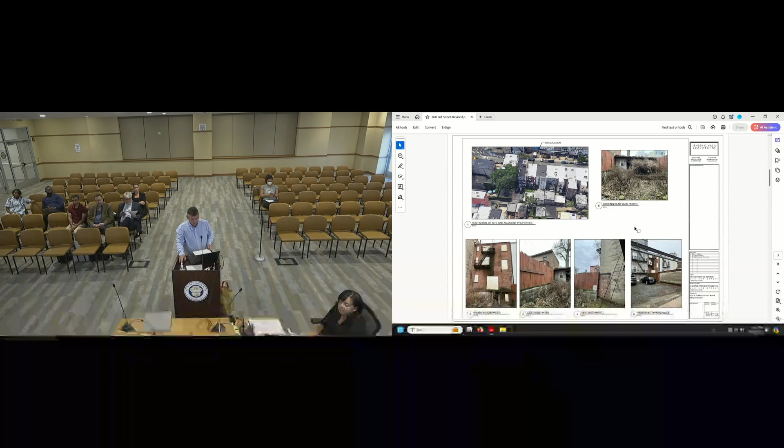Moving on to HPC 3, you can see the aerial view from the north in detail 1, showing the mixture of rear additions and garages, and then through that alleyway, which bisects the block.

Number 2 is the existing rear of the building. The building had been gutted, the interior is completely gone, all finishes have been removed, wiring and everything, so they've boarded it up.

Obviously we would keep the existing structure. We wouldn't be moving floors around, and we'd keep the openings in the front, as I mentioned, so there's no substantial change to that. When we do the addition, we'll be keeping the returns of the brick wall of the original principal building up to the jamb line of the windows on either side.

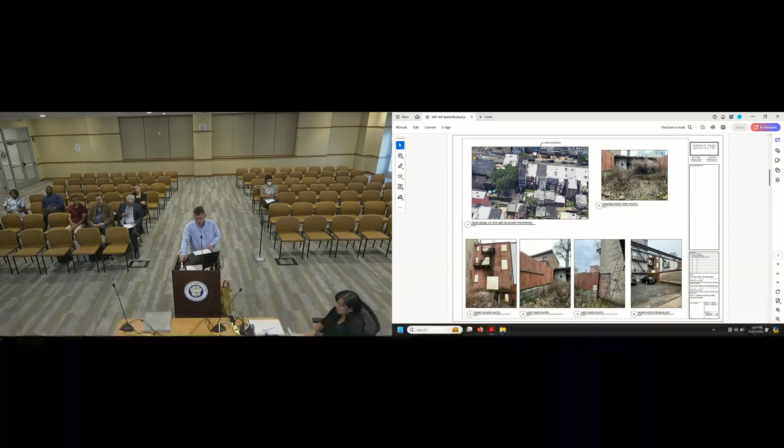Detail 3 shows the side yard, where you can see the building to the west is already a 2-story garage, and we'd be going right up against that. That's where the wood fence on top of the retaining wall would be. To the right is a sizable 4-story brick apartment building that would obviously remain. Number 6, the final picture on that page, is viewed obliquely from the alleyway, so you can see a little bit of the back through the neighbor's parking area.

HPC 4 is demolition of the existing building, showing what is there now. The stair is all the way in the rear, but there are no interior partitions. We'd be removing the fireplaces all the way up.

In the garage, we would be keeping the facade, the brick, the cornice, and the door fronting the alleyway, and then the back facade facing the court would be redone.

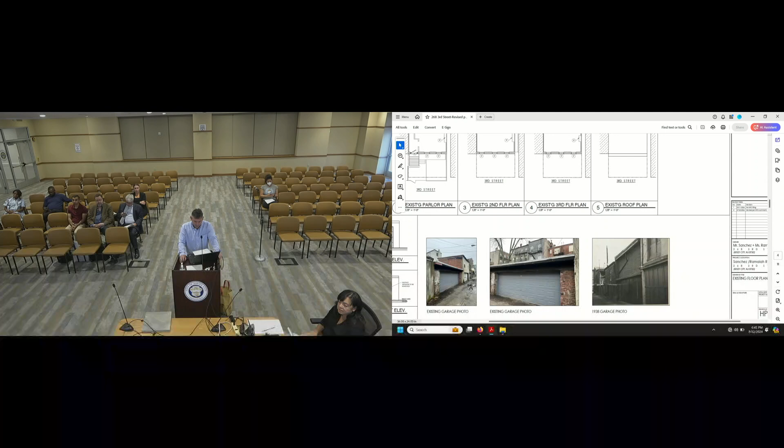I'm going to zoom in really quickly on the 1938 photo. It's actually a pretty decent photo of what was there from that time period, showing the 2 stories.

On HPC 5, the proposed condition has the bottom floor garden level as informal living space, with a family room, bathroom, and a guest bedroom, the parlor, and on the back a 2-car garage. We'd be adding a stair to the upper floor.

The landscaping and hardscaping would include pervious pavers with some synthetic grass in the back.

On the parlor level, moving up, it's the more formal kitchen, living, and dining main parlor floor, with a small Juliet balcony to the back. That extends the full 15'4" depth of the addition. Above that is the garage, with a bathroom and a small exercise room.

In addition, on the top floor there's a proposed roof deck on the principal structure that is set back from the 3rd Street frontage, so that it's not visible from the public right-of-way from either 3rd Street or the alleyway. It's set back from both pieces.

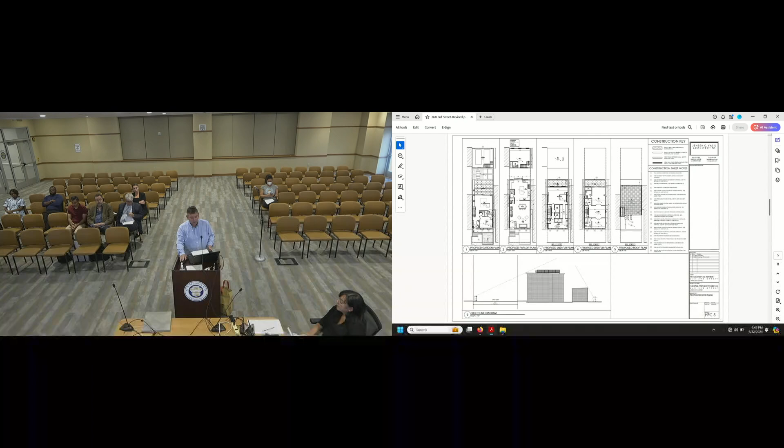I also want to point out the loggia configuration again. The side walls come out and it's covered on all 4 sides, and it's open to the back on the 2nd and 3rd floors.

HPC 6 shows the existing configuration. Detail number 1 shows the existing front elevation, which again will not change. The door that's there will be restored to the 1938 door and transom, with a glass panel and two wood panels underneath it, and the transom above.

One other note is that the parlor level windows will be brought down to the floor. There's site evidence, which I can show you in another photo, that this was the original case, as it was on the 1938 configuration. I think there's site evidence of it.

Number 3 is the existing rear elevation, which obviously is going away. The proposed rear elevation has the loggias at the bottom floor, an outdoor enclosed living area. On the upper floors it's a balcony covered on 4 sides, with a cable rail at the back where the loggias are.

The small portion of the back wall facing north would be stucco, and lining the side walls and back wall would be shiplap Ipe siding, giving a warm color palette between the Ipe and the Benjamin Moore calm stucco color. There really isn't a lot of stucco there, it's primarily focused on just the wall thicknesses that are exposed to the back.

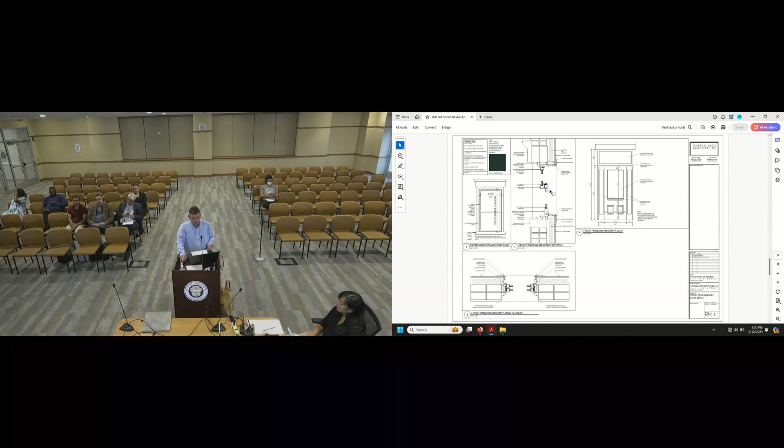HPC 11 covers the few remaining windows, the casement and awning windows at the rear of the building, also in Marvin standard black.

That should conclude my testimony, and I'm happy to answer any questions that commissioners may have.

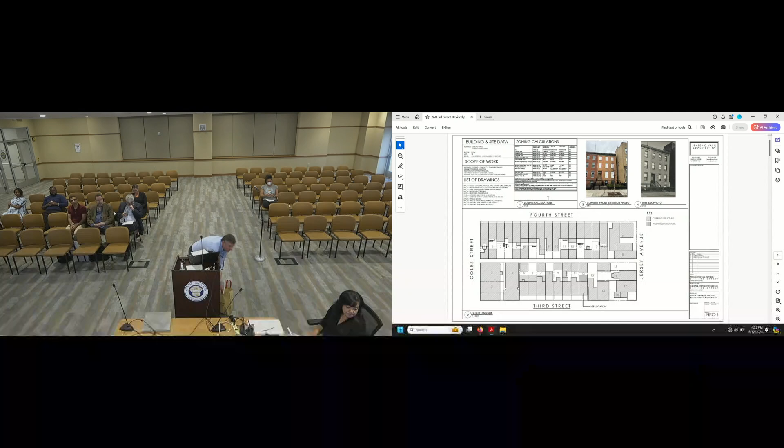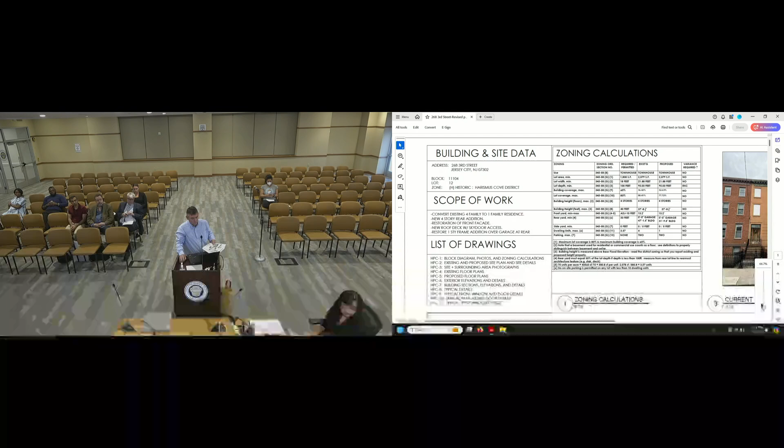On the facade, you went through that pretty quickly and used the word restore. I understand you're replacing the doors with new ones, using the 1938 photograph as your guide for what to put there, including the surrounds around the door?

I'm going to zoom in, but yes, everything would be restored to the 1938 appearance. The door that's there now, which is a later replacement, would be removed.

You mentioned the color of the windows being Essex green, and the door as well? Yeah, they match. And that goes for below the water table as well? That's correct.

Is there an entrance under the stairs? There is an entrance under the stairs. There's an existing iron gate there that would remain.

And all the ironwork up front, the staircase ironwork, is being scraped and painted? That's correct. As a side benefit, the husband of the owners is a metal worker, so that helps, since it's part of his trade.

Speaking of the front facade, have you done any probes or thought about removing the brownstone or stucco that's on there? We saw another building in this row, maybe on the other side, where they did probes showing the brick was very damaged, so we let them put new brownstone on there.

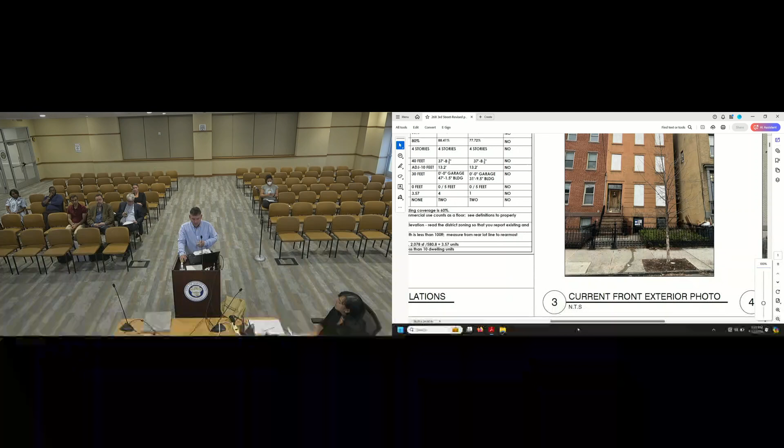What we could see here, the stucco's been on there for a very long time, and we didn't want to mess with it. I felt the safer course of action would be to resurface the stucco. They put quite a bit of thought into this—when we did 282, we found score lines within that upper piece, showing detail that was considered when the stucco, or brownstone, was done here. So we felt that was the proper course to maintain the stucco.

And the existing cornice, you're restoring it, leaving it in place and just cleaning it up, yes? That is correct. And I realized the historic evidence for the parlor windows was the 1938 photo, which shows the infill pretty clearly.

I have paint samples. Are you putting any plantings in the existing bed in the front? So that would all be replanted. I didn't note the specific types of plants, just that it was going to remain, but typically on these I'd like to do a mixture of boxwoods and hydrangeas and things like that.

And the tree out front looks pretty bad too. Would the applicant consider replacing the tree? I'm sure they would, yes.

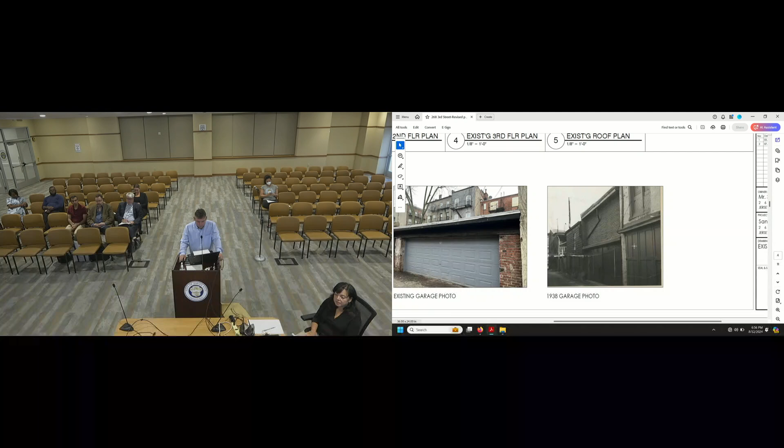Was the height of the addition on lot 5 also full height? No, on lot 5 it was only one story. And are there other 4-story additions on this row, lots 5 to 12? There's a 4-story addition at 276, which is mostly full width, if you can see it on the aerial.

But that's the only other one. 268 is a similar L-shaped 4-story addition, although not as deep as ours. The other ones are 4 stories but partial.

I just want to add a comment about the depth of the addition that's proposed. I know Brian was referencing Lot 5, however it seems that the property at Lot number 8 sort of bisects the block a little bit, so we don't really have that relationship to the other buildings on the block plan except from ours and then 9, 10, 11, 12, 13. So my question is, why does the addition need to be so much deeper than what's on lots 9, 10, 11, and 13?

Because I feel like it's going considerably beyond the depth of the neighboring properties, and it's going to have an effect given how little donut there is there, like the rear yard space, and then also combining that with the addition on the roof. I think that's going to have a big impact on the volume that's back there.

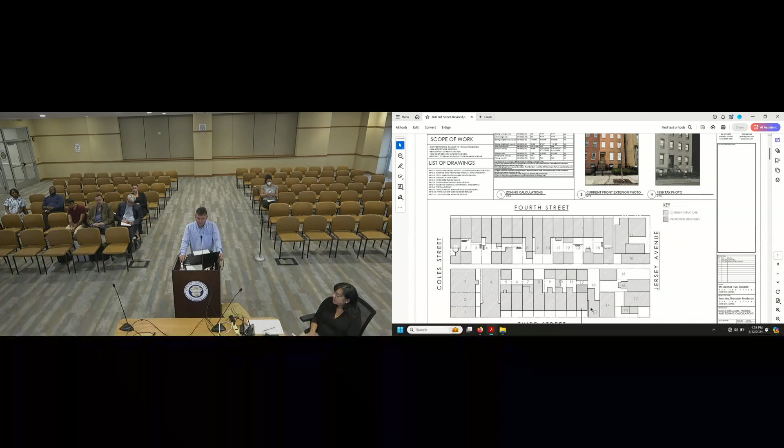We felt it was... I don't have the exact depth of 10 and 11, but just from a coverage perspective, it was under coverage by a decent amount. So we felt there's a deeper front setback, and the building could handle a slightly larger addition.

Plus the casting shadows - it's really not casting shadows onto any other building there, except for possibly the back of 13, which wouldn't be alleviated by making that addition any less deep, because on lot 13 the building is up to the property line. So because their building is shifted so far forward, they have a similar bulk as we have, they just shifted the building further forward.

Well, I guess I'm reacting less to the bulk and more how it impacts the yard and the volume of what's behind the buildings. It does make the yard quite small, but I don't know that from the block perspective it has a huge impact, considering how overbuilt that block is already. Put it that way.

One of the things I was toying with - I kind of agree with a lot of your points - and maybe a way to cut down on some of that, and I think the loggia is an interesting idea, but maybe it's something like at the top floor that's cut back a little bit, and maybe that could be an open deck or roof deck instead of a loggia at that top floor. That could cut down a little bit on the height, because the full 4 stories plus the addition on the garage might just be a little too much. Though it is kind of overbuilt there already, I think taking that loggia at the top floor and having it be a roof deck could be a good solution.

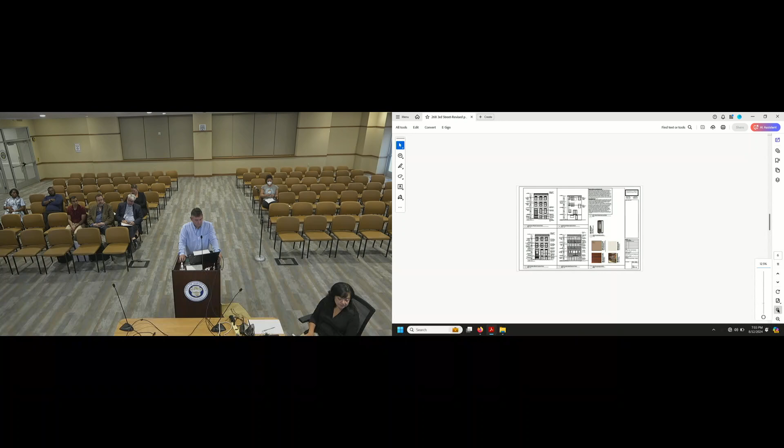Just a general comment. I've seen a lot of your applications before, and in general I find your applications very complete. This particular one, I'm missing a certain level of detail I guess I'm accustomed to your drawing sets producing. That rear elevation, I'm having trouble believing that stucco comes right up to the stucco of the parapet level without some kind of metal or flashing.

The front elevation door has a general TBD note that says details to be approved by HPO. There's a lot of things I would typically like to review at this level specifically, rather than remanding it to staff, that I wish I had a better sense of, so I can get a better sense of what the application actually includes.

Are there any other questions or comments? Hearing none, should we move to public comment on this application? If there are any members of the public present who would like to speak regarding this application, you can approach the public comment mic. All right, staff sees no members of the public present and recommends a motion to open and close public comment. Motion. Second. All in favor? Aye. Okay, we can move into staff comments.

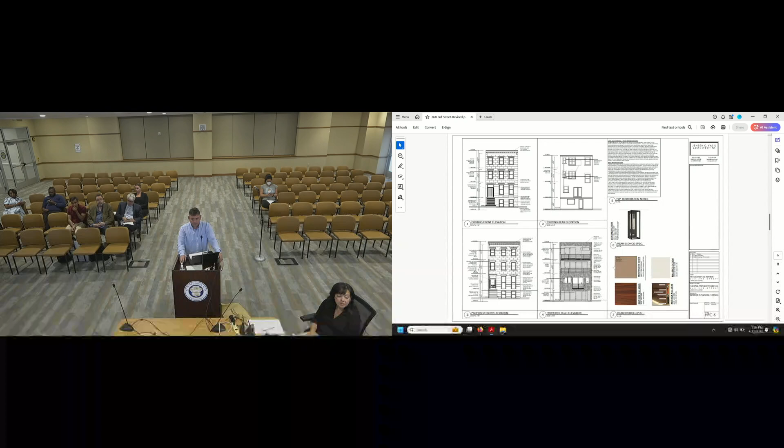Maggie, did you consider material on the garage second floor, given that they're showing a photograph? I believe it's brick in the photograph. Did you have that conversation with the applicant? No.

Both materials are equally appropriate. If the commission feels more comfortable approving brick because it's present in the 1938 photograph, I would be supportive of that. But I do think, obviously, it is a reconstruction. They are already making changes. It's a reconstruction of the bulk, not of what was there originally. So doing a different material, you can make an argument for both, is what I'm trying to get at. Understood.

All right, are there any other questions? I know there was conversation about the size of the addition, and you noted about the previous approval. Was it also for full 4 stories? Okay, full 4 stories, and full width.

I think the difference is that garage addition does change my perspective on it, which is what I think what I suggested would be appropriate to me. I think to take that top loggia and turn it into a roof deck essentially. So I don't know how other commissioners are feeling on that.

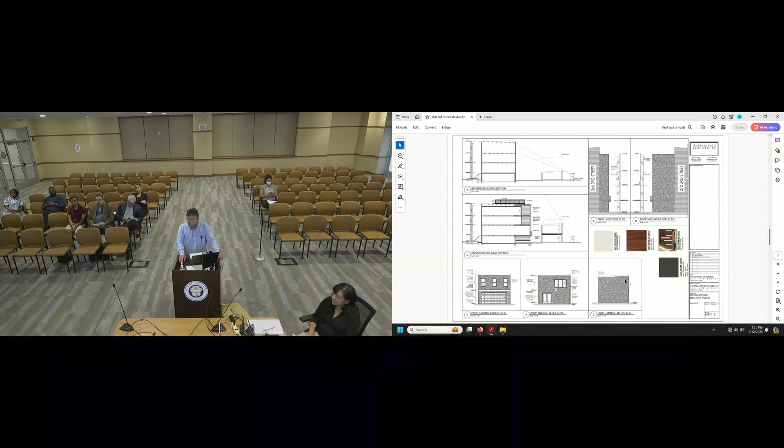Would the applicant consider making that top loggia a roof deck? Yes. I do want to note for the record that would also mean the rooftop roof deck would shorten. Correct. Right, because it would need to not be seen from the public right-of-way, right? Well, not even that — if you look at the photo he has up on his proposed section. Oh yeah, it's roof over deck, the top of it. Yes.

Yes, understood. So that would pull back likely to the edge of the building, right? Correct, or plus or minus a foot or two. That is correct.

Yeah, I just want to reiterate that one of my concerns about the overall envelope volume, even though the top 2 floors are open in the back, is just that there's the sidewall condition, so it's effectively enclosed as far as the neighbors are concerned. I just think that if it were possible for those two to be pulled back, so there's a little more breathing room in the yard space — just because there's so much volume, especially since the garage is sort of out of our hands and that's effectively approved. We're working with a different site condition than what may have been approved in 2020.

I just want to clarify, are we suggesting to the applicant that they pull back the enclosure of the loggia for only the top floor, or the top 2 floors? Top floor. Top floor only, right? Yeah. Or the top 2 floors — well, that's what I wanted to clarify.

Yeah, my concern is that 4 stories, all the way back as deep as they're showing it, whether it's enclosed or open to the back, is simply too big — especially in light of the extension of the garage to a 2-story structure. Right, it just feels too enclosed, too deep, and if there's a way to handle that differently, maybe it's something I could approve, but maybe nobody else agrees with, and that's fine.

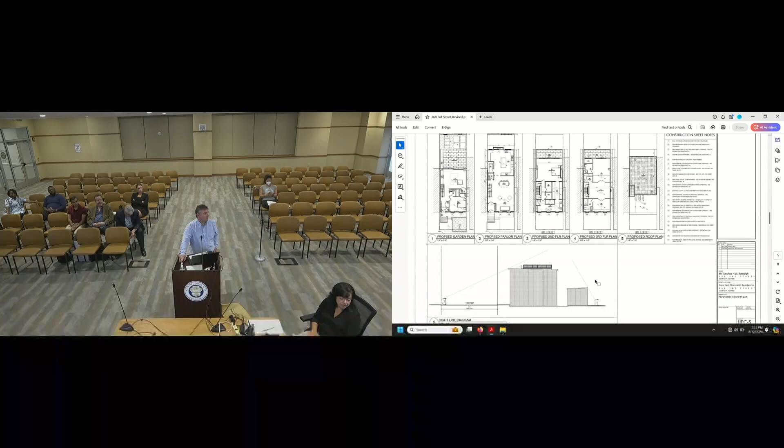The front door transom is a wood frame, not glass, though there's clear glass in the center, same as the light in the door.

Is the intent to paint the wood the same color as the framing of all the windows? Yes, the Essex green. And is the transom intended to be in the same plane as the door? Yes, it will be.

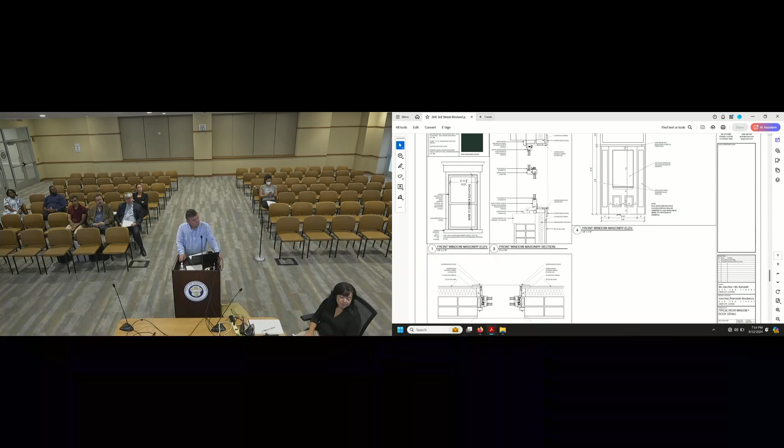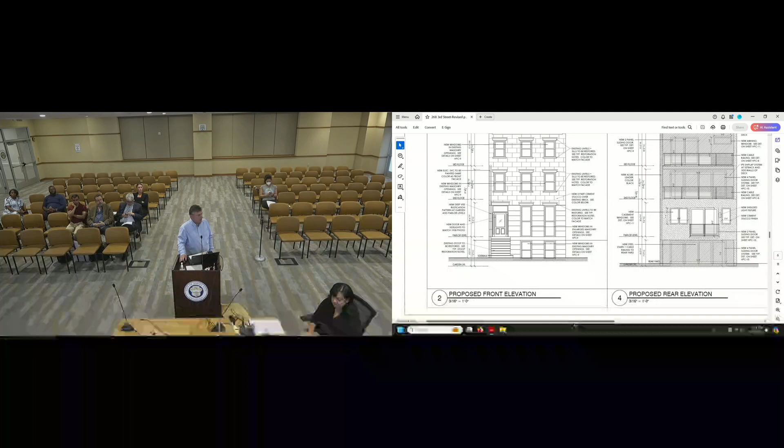On the existing building, the sills and headers of the windows are painted the same color as the field of the stucco. Is your intent to keep that relationship the same, painting both the sills and headers as well as the stucco? It is. Note 2 on the proposed front elevation says color to match the main facade, but there's also a detail of an enlarged window that says sills to remain, so we wanted to clarify.

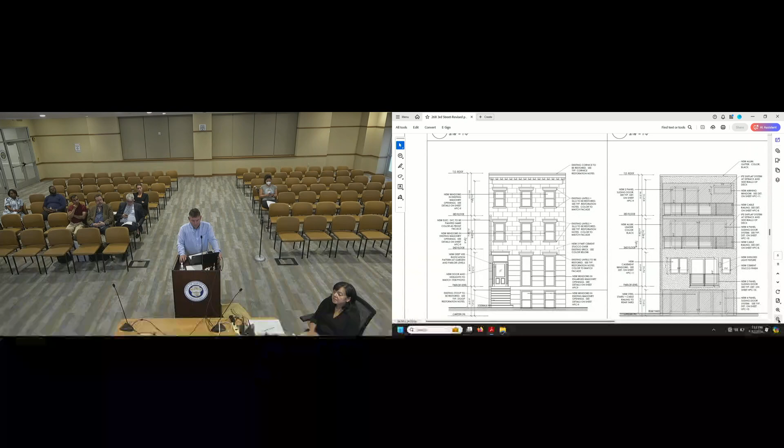I guess it's a question for staff, Maggie. Is your opinion that the color of the sills and window headers should be the same as the stucco?

On the 1938 building there's no discernible difference between the color of the facade and the color of the lintels and sills. A great deal of care went into making this building look like a masonry building, meaning these elements would have been finished in the same fashion to match, so they all blend and read as sandstone or brownstone. So yes, it is staff's opinion that they should all be the same color.

Thank you. You're welcome.

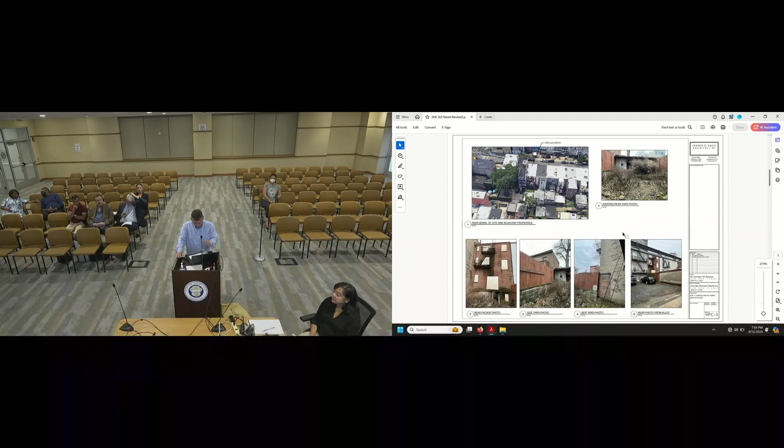Are there any other questions for Jensen? Should we confirm the applicant is okay? It sounds like the commission is inclined to approve the application, provided the applicant removes the sidewalls and roof of the top floor loggia, reducing the size of the roof deck. That appears to be what the commission is inclined to approve. Jensen, are you comfortable with that? Yes. We also have the additional condition read into the record regarding the street tree.

Austin, I have noted your detail items to make sure they're present at construction documents. Are there any other items the commission would like included as a condition of approval? Maybe a planting plan for the existing planting bed. Would you feel comfortable with that clarified at the time of construction documents? Sure. Planting plan to be included at CDs.

Staff's recommendation is to approve with conditions read into the record in the staff report and accepted by the applicant. I'll make a motion to approve with conditions as read. Second.

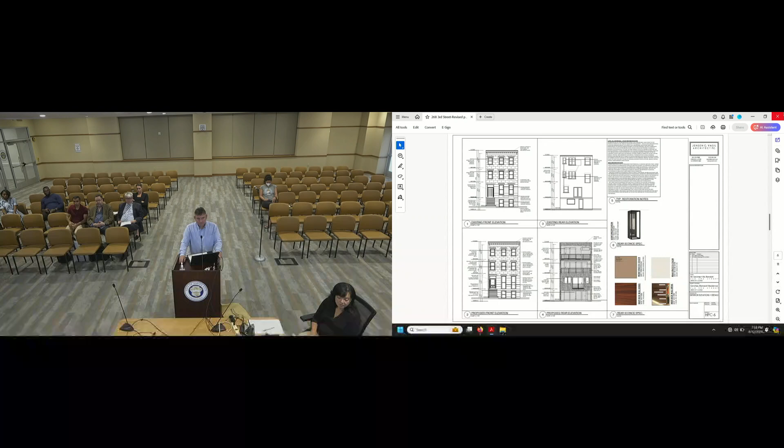Very good. Thank you all. Thanks, Jensen. Have a wonderful night. Thank you. All right, we can move on to our next case.

I'll call case H24-146. The applicant is Charles Harrington, Esquire, on behalf of 299 Fifth Street LLC, owner. This is for 299 Fifth Street in the Harsimus Cove Historic District. The application is for a certificate of appropriateness for interior renovations, facade rehabilitation, and a full-height rear addition visible from the public right-of-way, at a contributing altered transitional Greek Revival row house constructed circa 1860.

Good evening, Commissioners. Tom Lean, in place of Charles Harrington this evening, on behalf of 299 Fifth Street LLC. We are seeking a certificate of appropriateness, including a full-height rear addition visible from the right-of-way, visible from Cole Street through a vacant lot. It's our understanding there were approvals to develop that site, though I believe those approvals are no longer in place; we don't know if there's ability to extend them, but we anticipate someone will develop that lot eventually. Other than that, I have Scott Mahaffey here as my architect who will run through his plans and answer any questions of the board.

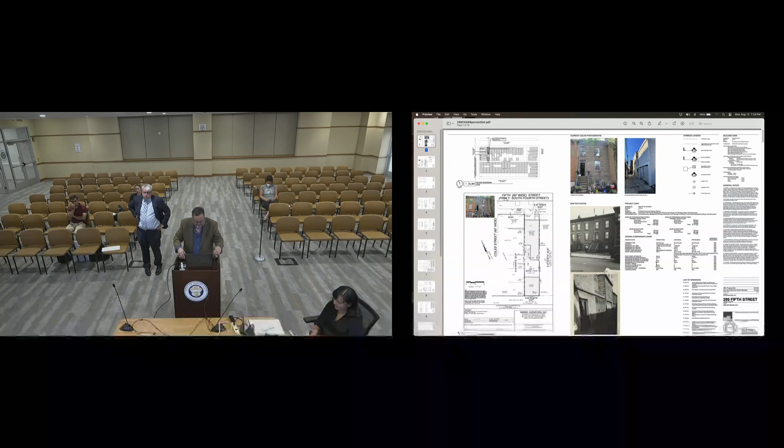Let's see if I can make a little more room here. Given some of the conversations you were just having about the size of... well, actually, let me start with the front.

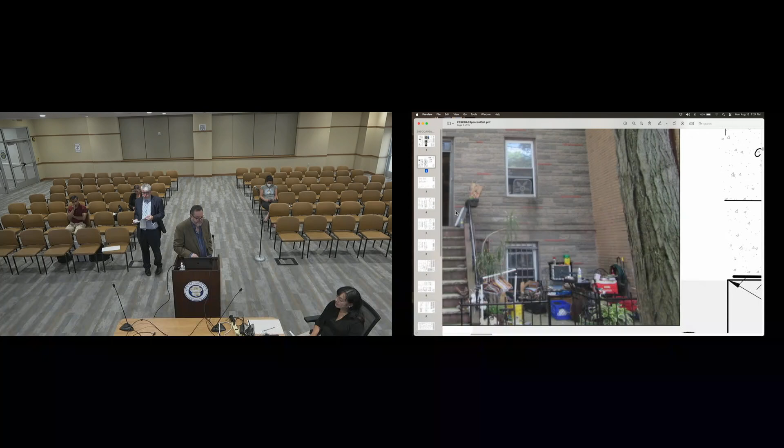So in the front, we're going to remove the brick face off the front of the building, and we're going to replace the aluminum windows with new wood windows. The existing stoop is actually in fairly good shape; we're going to clean it up, paint the railings and stuff like that. The front door is being replaced, but the existing frame is in pretty good shape, and there's an existing transom and frame that we're not going to do anything to except make sure is in good shape.

And... sorry, there you go, my fingers don't seem to like this. There we go. All right, so we're replacing all these with standard Marvin double-hung ultimate windows.

There was a question about the paving. Right now, the entire lot is paved, although interestingly, the garage in the back against the alley has a dirt floor, but the rest is all concrete. So we're going to remove the concrete from the front of the building and put in a planting area. I've had several requests into Mr. Reedon for a list of what those plantings would be, but I haven't gotten that list yet, so it's not on the drawings just yet, though we do expect to have a planting schedule for that front area. We're also going to do that in the back, where we're removing all the concrete between the front building and the rear building.

Not sure why this isn't... my fingers. All right, so from a basic site plan standpoint, that's what we just talked about at the front. Wow, my touchpad does not like my fingers tonight.

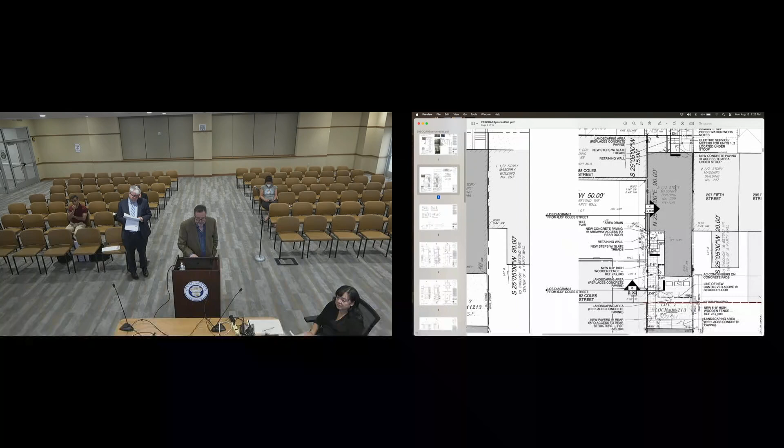The front building, as mentioned, is going to get a gut renovation inside. The second piece is there's an existing frame structure, a rear yard addition that seems to have been built sometime between 1885, because it's not on the Sanborn map in 1885, and there's a small one on the 1906 Sanborn map.

But the construction of that addition, the wood sizes and stuff, are clearly from the 1930s, post-1928 dressed lumber sizes.

The third part is there's an existing wood structure that also doesn't show up in the 1885 plan but does in the 1906 Sanborn map. So it was built not as a garage, but as a stable, and has an upper level that was actually built as a hayloft. Our plan for that rear structure is to maintain it as a garage and add a unit above there. Currently, the property has 2 units, both in the front building, and the size of the property allows for 3 units total. So we're going to add a 3rd unit as a studio apartment where the hayloft is over the garage.

Let's see. I don't think I need to say anything else about the front of the building, right? Do you need to see the floor plans of what we're discussing? Okay.

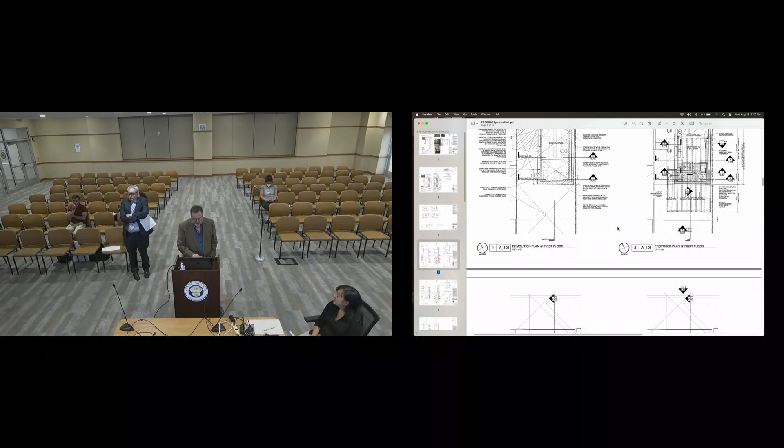We're not calling it a basement, we're just calling it the first floor, even though it's about a foot below grade, just to make things simple. So the lower level, the first floor, will have 3 bedrooms and 2 bathrooms. The garage will be kept as a garage.

The existing building coverage, because there's 2 buildings on the site, is already 60-65% of the lot, so we're already above that number. So what we're proposing is not necessarily a full height extension, but rather to remove the last 4 feet of the rear yard addition. It's 16 feet long. We take off the last 4 feet and cantilever on the 2nd floor and 3rd floor an additional 7.5 feet to make for a bedroom you can actually put your furniture in. The current bedrooms are like 9 by 7, very small rooms.

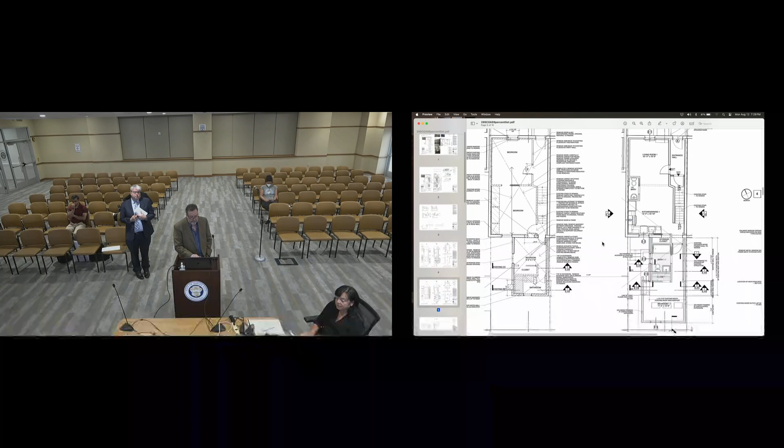And that would give you a unit on the 1st and 2nd floor that has 3 bedrooms and an office, you could say, or 4 bedrooms and 3 bathrooms. The unit on the floor above, the 3rd floor, we do the same thing, take off the rear 4 feet, extend that back 7.5 feet, and you'd have a 2-bedroom, 1-bath unit on the 3rd floor.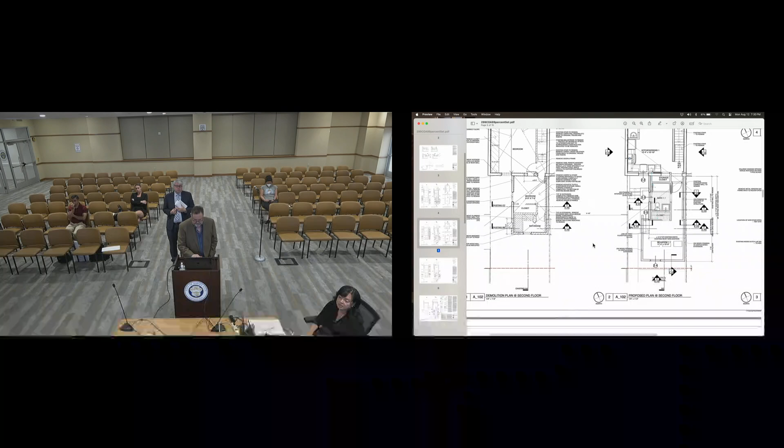Let's see, did I pass by the studio layout? I did. Since the hayloft doesn't have a stair to it, there's basically a little hole that barely one person could fit through, and right now just an aluminum ladder. We're going to be reframing that 2nd floor using the existing beams, flatten them out, and make it into a studio level with a stair running down the side down to the alley. There'll be a bathroom, kitchen, a nice 300 square foot space, I don't have it in front of me.

That we would need to reconfigure the existing openings on the north side of that as windows. Right now there's kind of a window. It doesn't look like it's original. And then put a new window in on the south side facing onto the alleyway.

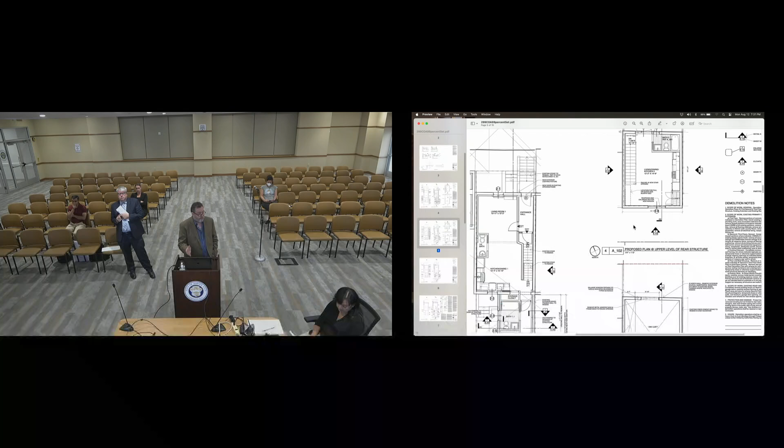Given what we said about the once and future approval for 8486 Cole Street, this is the one part of the building that's actually going to remain visible from the public right of way, even once that other building is built.

Here we go. So on this sheet is A201, which is the typical building sections. It's cut through looking towards the west. 5th Street is on your right, the alley is on your left. You can see in the darker shaded parts of that are the parts that we plan to reframe and rebuild for this extension, this cantilever, for the extension of the rear yard addition.

The next sheet kind of shows the same thing in the other direction. Both these sections are taken looking north. The one on the top is through the existing section. As you can see, we're not expanding it. The one on the bottom is through the southern part of this expansion, where we're actually making it 2 feet wider as well.

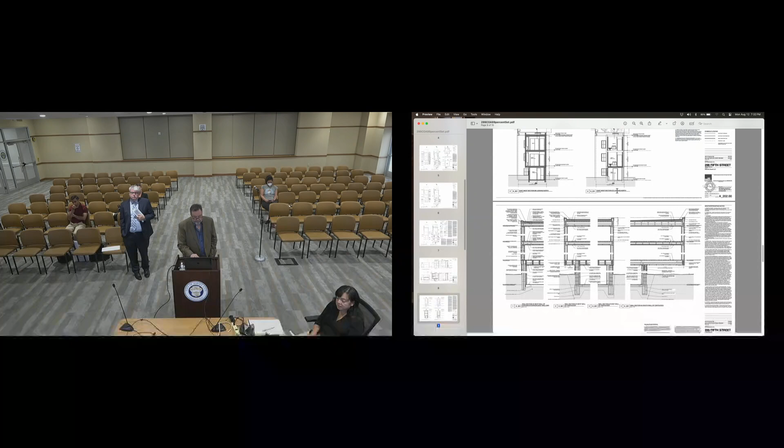These are just the wall sections of what we're planning to do. This one on the left simply shows that we're keeping the existing structure for the third floor framing and the roof framing. And we're reframing the second floor framing over the first floor in order to create this cantilever.

The next sheet shows all the windows. We're mostly using a 2/2. A number of the buildings on the block have had the windows replaced with 2/2s. We're also working on 88 Coles, which is the building on the corner right next to this, AKA 301 5th Street. The 1938 photograph from that project shows 2/2 windows from 1938 on that one as opposed to 1/1s. So we're proposing 2/2s on the parts of both buildings that were visible from the public rights of way, and 1/1s in the back.

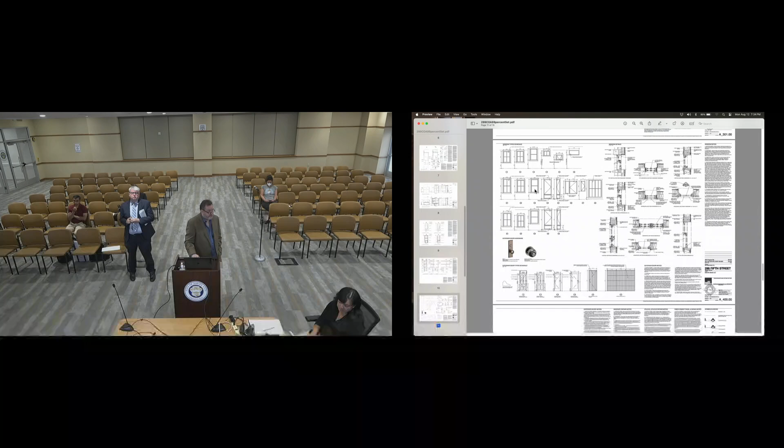The addition would be getting clad windows, and the window in the rear that faces onto the alley would also be a double hung, larger size 2/2 Marvin as well.

Many of the buildings around this have had their front doors replaced. This type A door is the existing stoop entrance door. The frame of it and the transom are going to be retained and painted, and the new door has a 5-panel layout, which is consistent with all the doors you see on the other buildings around it.

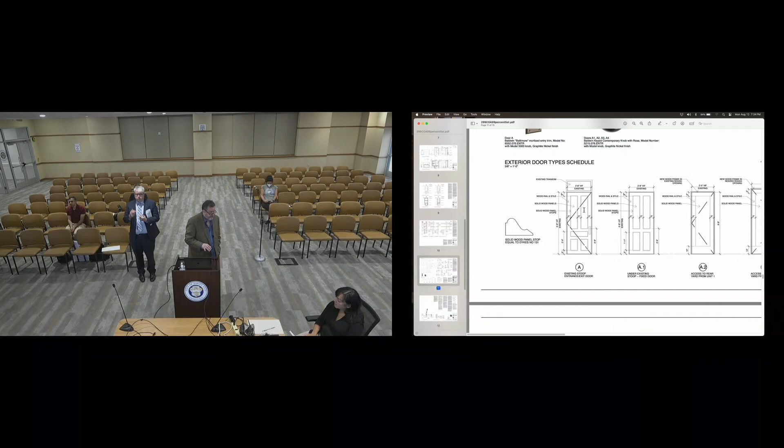In terms of the elevations on the street, you have the stone face that we plan to remove. We have not yet done a probe to see the condition of the brick behind there, but many of the other buildings on that street have had their brick or stone face removed, and you have common brick behind there in most of those cases. We're proposing to do the same thing next door on 88 as well.

We've done a walkthrough with Mr. Reedon on what that one looks like, and we're going to have problems in that building. While it's going to be a certificate of no effect, it has a lot more work required for it. You probably know exactly the building we're talking about - it's got mold growing up all one side of it, it's in really horrible shape inside and out. This building at least was being lived in up until last year, even though it's not in particularly beautiful shape on the inside as well.

Our proposal is to expose the brick if we can, do the 2/2 windows. The existing railings are original, and we're going to keep those. We'll do whatever repair work is required for the stoop. It's one of the few stoops along there that has the original railings, and they look pretty good, so we're going to paint those.

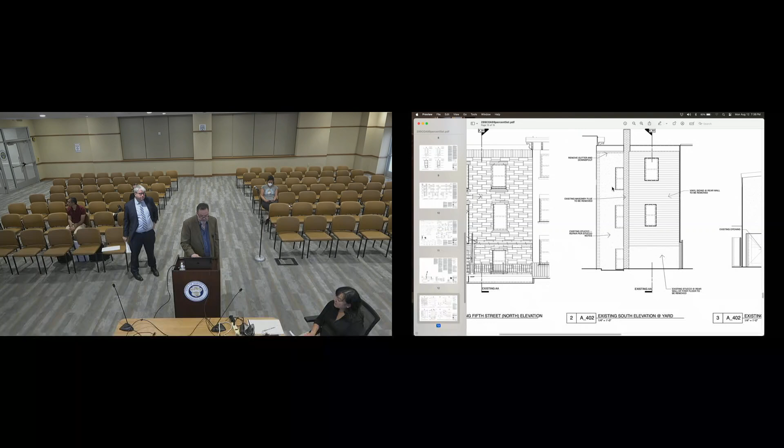In the rear, we'll call it the rear yard elevation - the rear of the original brick building has stucco on it, parging, and we're going to keep that. There are existing windows that we're going to replace with 1/1 wood windows. This portion of the rear yard is the part we're removing as part of the 4 feet we're taking off the back, and we're going to be putting new siding on the back of that addition.

Can you describe that siding on the back of the addition? Sure, if you don't mind me jumping ahead a little bit. A couple years ago, the south and east sides of the carriage house, or the stable in the back, had siding replaced with 6-inch reveal James Hardie cobblestone smooth finish HardiePlank.

There's stucco on the north side of that rear structure, so our proposal is to take the stucco off and continue the HardiePlank around the side. Then on the original 12-foot sections remaining on either side of the existing rear yard addition, we're going to take the gray plastic vinyl siding off and put the same HardiePlank there too. The new expansion part we're proposing would be done in HardiePanel, same material, but 4x8 sheets with battens every 16 inches on center. I have all those samples if this is a good time to pass those out.

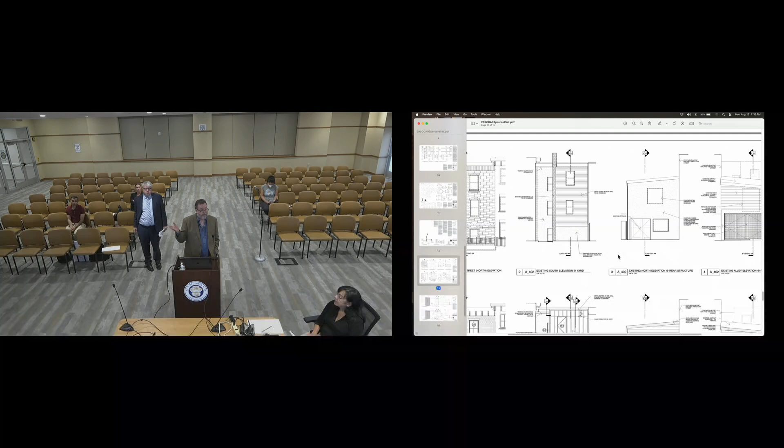It's interesting that we went a different direction. The idea is that you can tell, oh, that's the part that we added, and that's not original. The window sizes are all different. Every single window on this building is a different size, even more so on 88 next door.

But we're going to be as far as possible consistent, with the exception of this addition we're proposing and the rear wall facing the alleyway of the carriage house. The people who sold this project are named Cotrillo, which might be a name people have heard before. Apparently they've owned that building since about 1952, and they gave us a story about absolutely everything, which I've been told to take with a grain of salt.

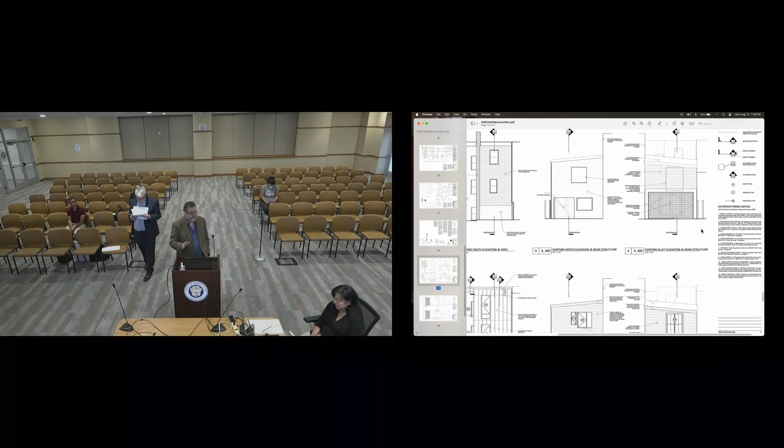So let me call attention to that alley elevation. I have lots of photographs of the poor condition, maybe you've seen it yourself. The existing garage doors are in very poor shape, so we're planning to replace them with an overhead door that has the same beadboard pattern on the outside. Right now there are 4 individual panels, and the drawing doesn't really show it, but they're supposed to bifold.

I guess they bifold enough, because there used to be a '32 Plymouth parked in the rear yard and a '69 Camaro parked in the garage that hadn't been moved in several decades, and they got them out of there. So the door opened enough to get them out. Would you mind showing us the photos of the current condition? Sure.

I'll start on the inside first, is that okay, or do you want to see the outside? The exterior? You were just talking about the outside doors. Okay, that's what you meant by the beadboard. I have even more pictures on the inside showing the rotted pieces. Unfortunately, they're in very poor condition.

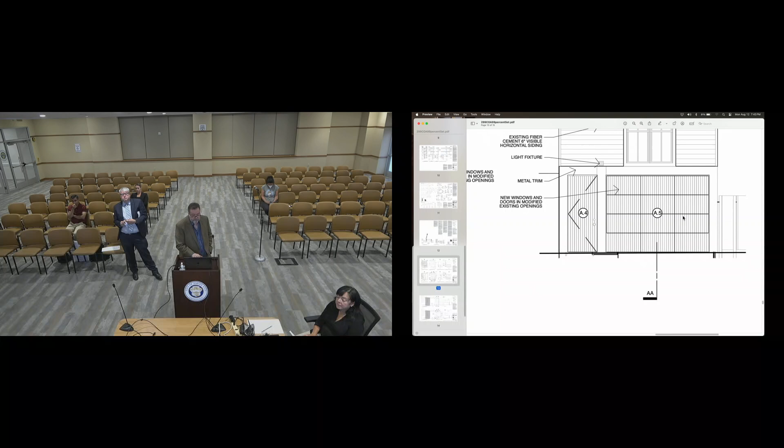Originally, according to the 1938 photograph, upstairs was just a little hole for loading the hay in. So we're proposing a nice big window because this faces south, which would be nice for the studio apartment to have a decent sized window in it.

Let's see... I think I've probably left some stuff out, but that comes to the end of the drawings. Like I said, I have lots of photographs if you want to see any other reasons why we're proposing to do what we're doing. Well, the only thing I was going to ask is, do you have photos from Coles Street that show the view through the vacant lots?

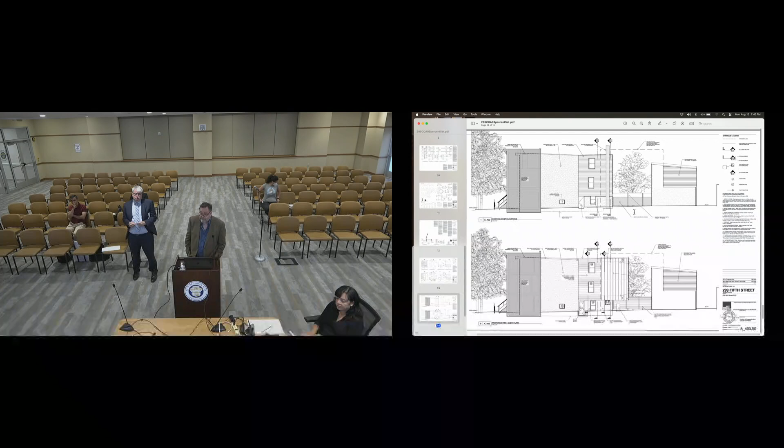Yes, I have photos and I have computer renderings. That would be great, do you want to see the computer renderings? Both? Why not both, okay. Can we mark the renderings before you show them, just as A1? Maggie, I have a question.

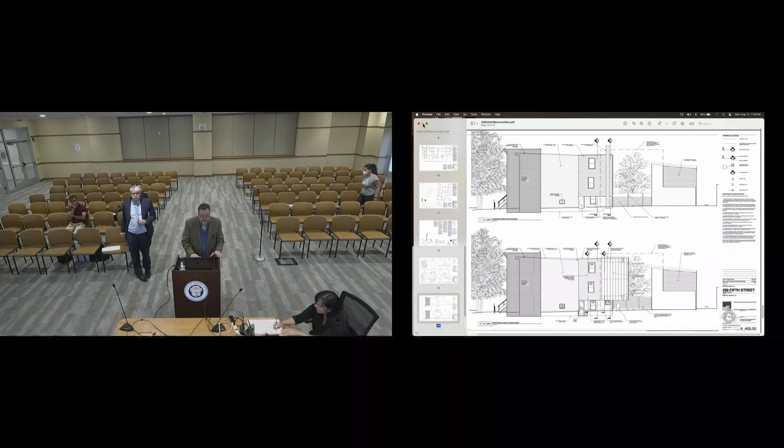Did we not approve a plan for that vacant lot on Coles Street? We did, I'll discuss it during staff comments. We can discuss it more in depth, but that approval has long expired. And I believe you told me they had never actually memorialized it, no, either. They had not.

And just so you know, I have 7 of these, or 6 of these images.

So this is a computer model looking at what would be visible from Coles Street. On one side is the stucco, that's on the side of the original building. This is the cobblestone HardiePlank we're proposing for the extant section of the addition. This little strip of gray is what you see from directly across Coles Street. You say, well, what if you do a more oblique view? Okay.

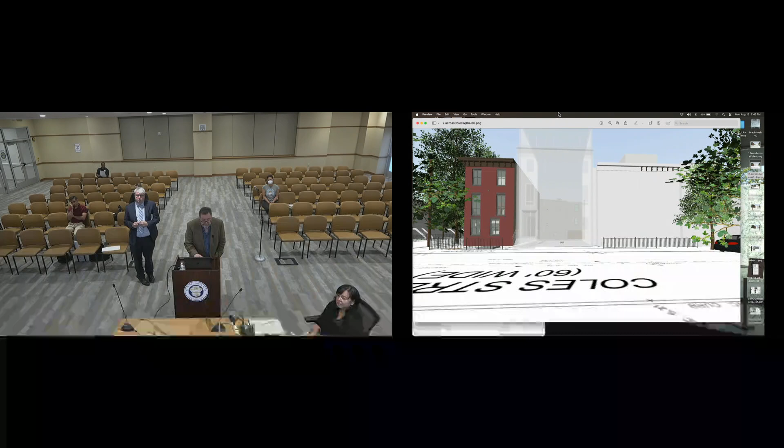If you go down Coles Street a little to the south, you don't see any of the work we're proposing. If you go the other way, standing across from 88 Coles, you see a bit of the gray timber bark color we're proposing for the extension, the new section. And if you go right to the corner, you see the Hardie panels with the battens on the side of that extension.

So those are the shots from Coles Street. I also have - which I guess would be next - sorry, connecting to this has made everything on my screen smaller, so even though I have my reading glasses on... okay.

So this is a computer model showing this gray box as the extension we're proposing, and you can see it in relationship to the other rear yard extensions, with the exception of the one just completed - this darker gray at the left at 289, which I believe was approved in 2022. It's recently completed, full height, full width. The other ones are not, and we're not proposing full height or full width either.

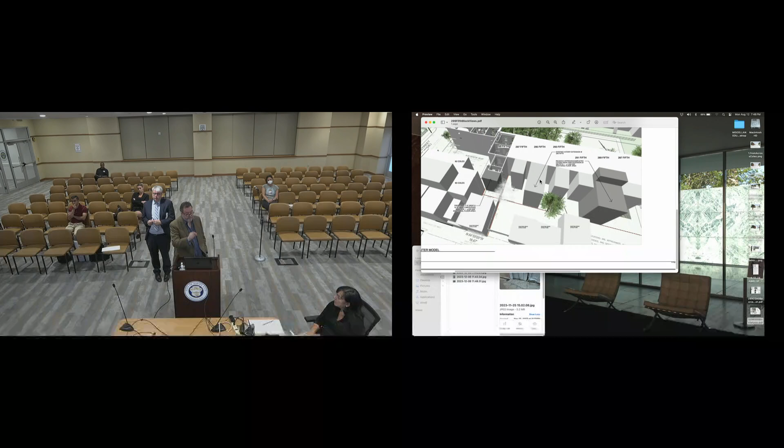This red line here is the rear yard - the 30-foot rear yard setback from the alleyway - and we're at about 32 or 33 feet from there. This one, where I have my cursor, that rear yard addition shows up on the 1885 Sanborn map, so that might actually be the first precedent for this particular block, and that's this part right in the middle here.

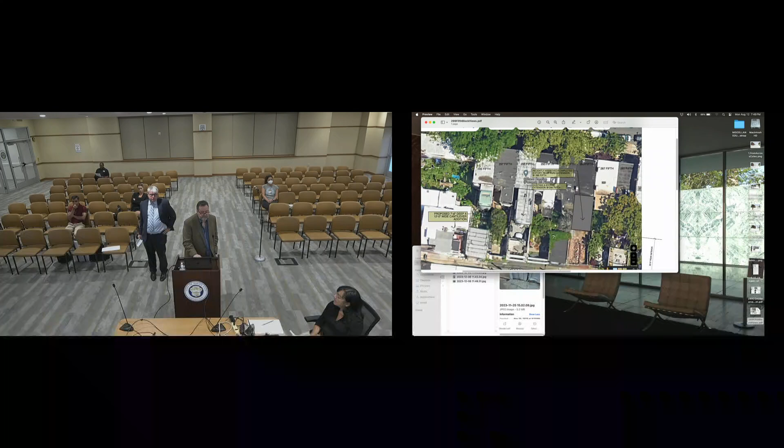This is the part that was approved a couple of years ago and just recently completed - Jeff Jordan was the architect on that. This is us, with a little bit of addition we'd like to have on the back. And is that sufficient, or what else would you like to see?

No - well, are there any questions for Mr. Mahaffey that would lead to bopping around? Has the board... have the plans gone all the way around? Okay, and I don't know if you showed the photos, but the only thing I wanted to add was...

I live nearby and I know this view, and the existing vinyl siding is very dilapidated and in poor condition. So whether or not we're going to consider whatever with the vacant lots there, approvals or not, this is going to improve that by the removal of the vinyl siding and the new HardiePlank. I think that's something to take into consideration as well.

Also, you saw in my images some improvements we're planning for the corner building at 88 Cole / 301. Those haven't been approved yet, but on the material sample board the bricks are shown very dark - that's not accurate, my apologies. There's only a certain number of brick options; when I tried to take a brick color and put it on there, it just made it red.

So the other buildings around there have common brick - apparently they were originally painted. As you know, common brick is a whole mixture of browns, blacks, reds and oranges, a whole mix of colors which doesn't exist in Vectorworks' RenderWorks library specifically.

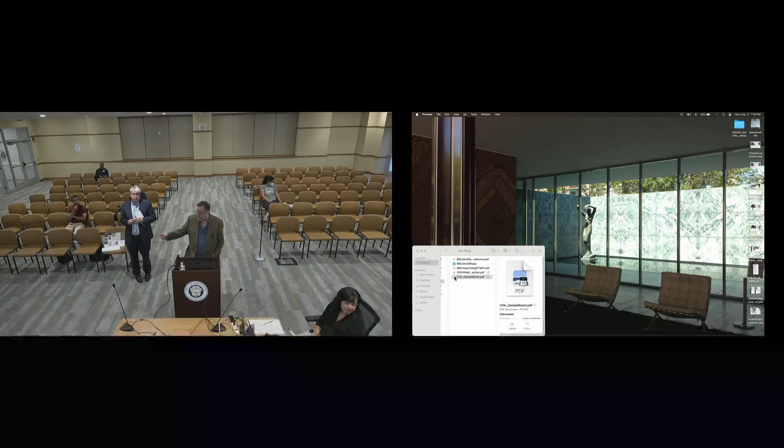If you want, we can pass it around, the sample board. Oh, you know what I do have? For my own purposes, in case I forgot what was on it, we can pass this around. It doesn't have the actual paint samples on it, but it has essentially the same information. It's the same as the board, just not spray mounted to a piece of foam core with the samples taped to it.

But the question you've posed is what to do with the facade if you cannot remove the material that's on there now, correct? Yeah, I thought if that question came up, I wouldn't have an answer. You're still doing the two-over-two windows, you're still doing the appropriate door, and then you have this material on the facade.

One other thing I forgot to mention: right now the cornice is covered up with metal panels. The contractors assured me that the cornice is still there behind the metal panels, because they were the ones who paid to put that up in 1957 or whatever.